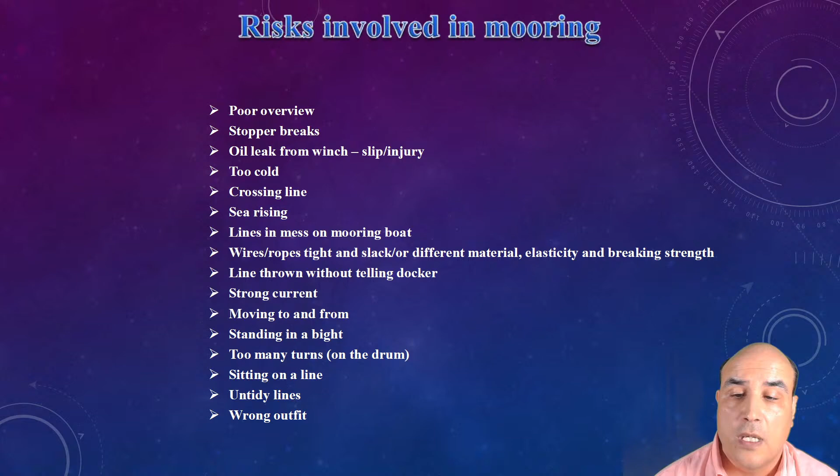Also, a mess on the quay when we're going to moor our ship, line caught in fender - this can create a snapback situation - bad communication between all parties, like pilot, master, mooring boat, tug master, and the crew fore and aft. Lines lying too long in sun and water, so we don't have proper housekeeping of the lines.

Language confusion, especially due to the fact that we have multi-ethnic crew on board, and this can create language confusion because not all crew speak the same mother tongue. Bad lighting, poor communication between pilot, captain and tug - this is in relation with, generally speaking, bad communication. Line singing before it parts - parts means cut into two pieces.

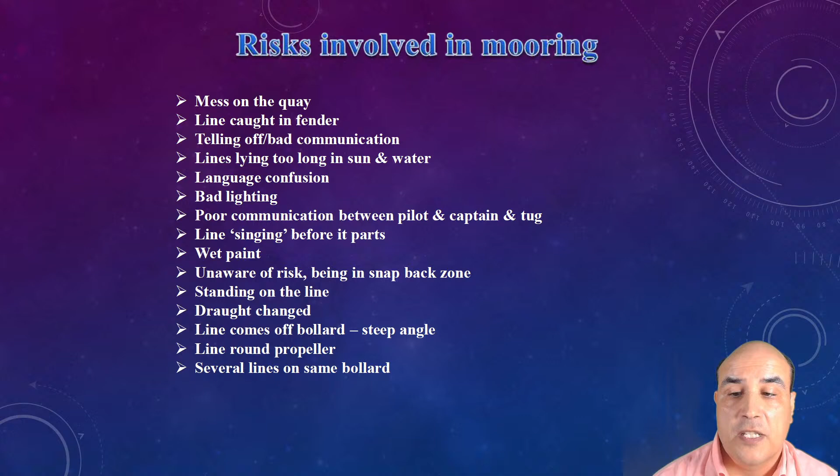Wet paint, unaware of risk, being in a snapback zone - this is in relation with onshore and onboard training of the crew. Standing on the line, draught changes, line comes off bollard, or having a dangerous steep angle - we'll see how a steep angle can create tension in the line. Line around propeller, several lines on the same bollard as unsafe practice.

Mooring incidents, when analyzed, can be categorized into 4 safety factor groups. This is in relation with risk management. Individual actions relate to human action by operational crew. Local shipboard condition is predominantly in relation with ship motion, or swell on the port. Organizational influences are organizational shortfalls, for example, lack of safety culture, safety management system that is not effective on board, lack of supervision by company, or lack of training by company or onshore support. Last but not least, design and equipment, design shortfalls or component failure, for example, mooring line parted.

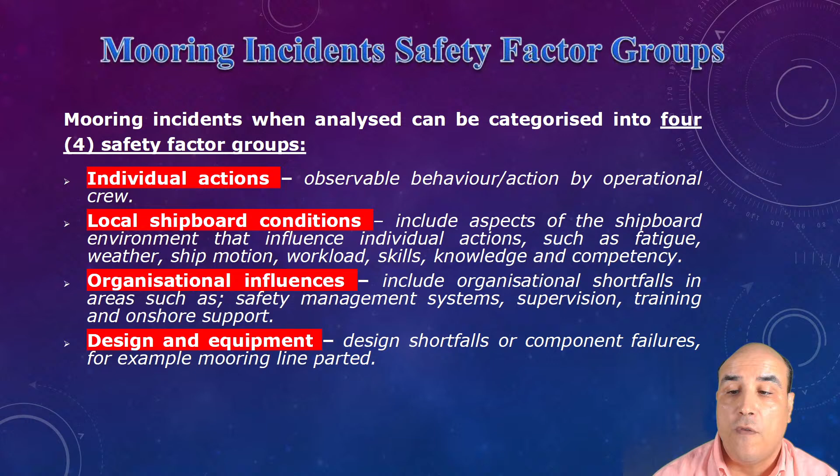Here we have some pie charts in relation with incidents. As you see, hit by parted ropes 53%, hit by non-parted ropes 42%, and only actual equipment failure only 5%.

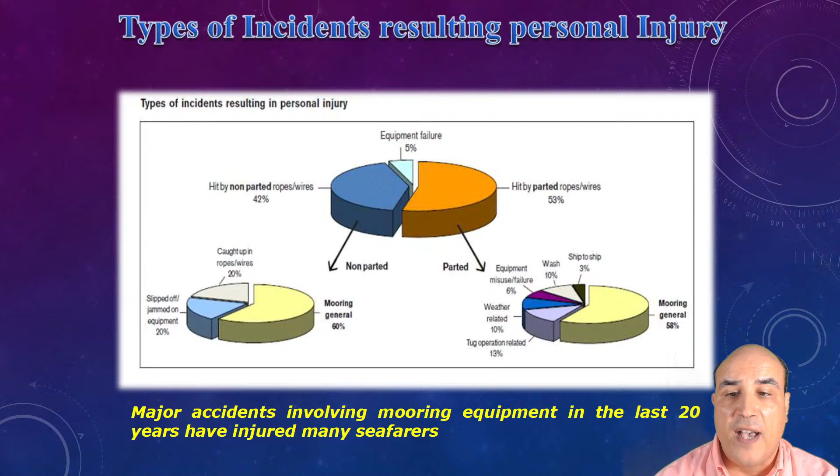Next pie chart is the reason that we make this webinar, just to show exactly the consequences of a human that gets involved with an accident during mooring operation. As you see in the percentage, more than 60% we have very serious injuries, plus 14% fatality.

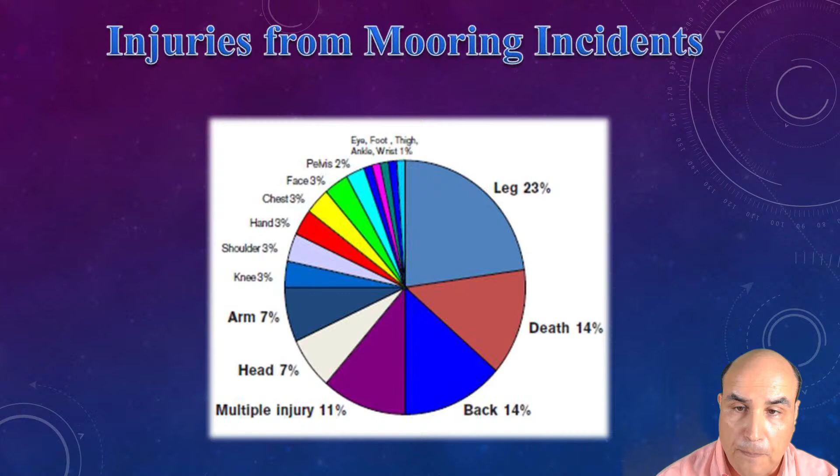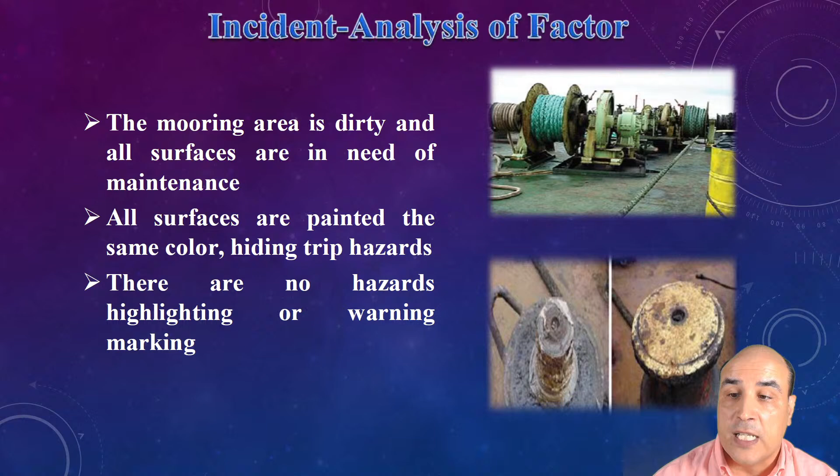Let's see the generic point of view analysis of these factors. First of all, the mooring area is dirty and all surfaces are in need of maintenance, so proper housekeeping is very important. All surfaces are painted the same color, hiding trip hazards. There are trip hazards that must be painted with different color, that's why we use yellow color for that. There are no hazards highlighting or warning markings.

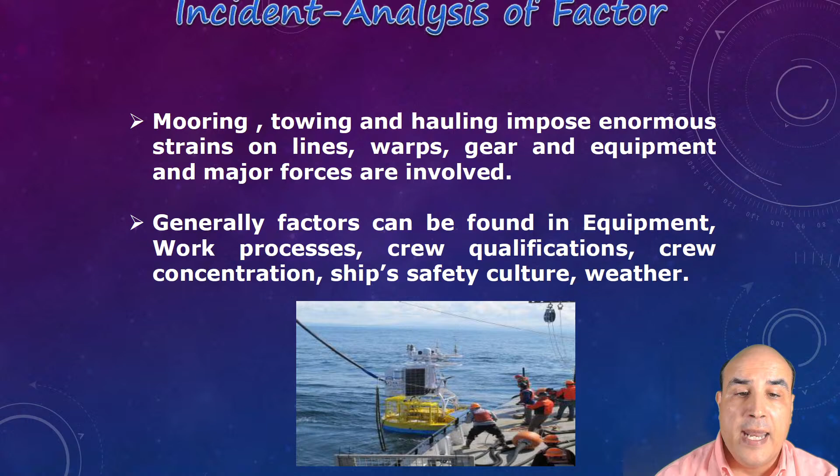Also, generic factors can be found in equipment, in the work processes through the safety management system of the company, crew qualifications, crew concentration, which relates to stress or fatigue of the crew, ship safety culture, and last, weather. Also, crew not aware of snapback areas, they don't know exactly what is a snapback area, or crew standing within a bight or coil, or crew has complacency.

Insufficient training, the person supervising also gets involved with the operation. Here I have to give one example: we have a duty officer on deck, aft, let's say, with 3 ABs, and instead of checking the position of his colleagues, he tries to do the job of an AB. So he or she is not watching. The job of supervisor is to make a risk assessment all the time, and of course to pass the orders or intervene if possible.

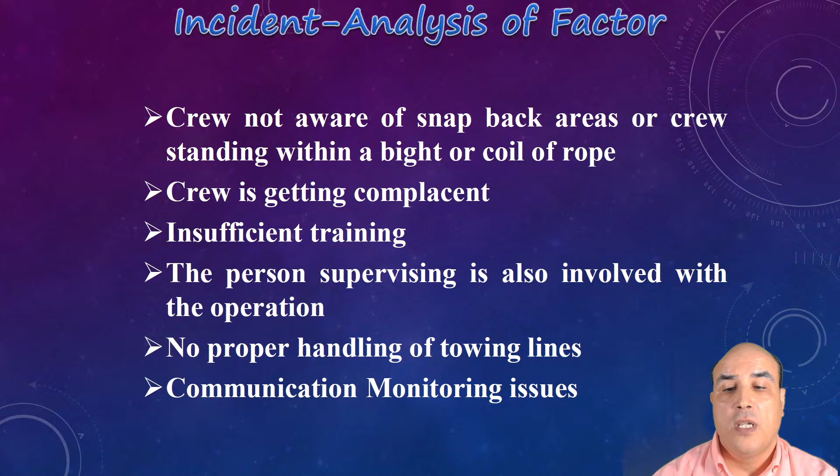No proper handling of towing lines, communication, monitoring issues. What we believe as humans is that things are safe if nothing happens. So because of that, we decrease the level of safety. And of course, if we decrease the level of safety, maybe we lose our concentration, maybe we slacken our procedure. So when suddenly something happens, it's not because of one factor, but because of a number of interacting factors, as we're going to see in the forthcoming slides.

Preventing accidents is about reducing the risk of these factors. Here we have the most common risks categorized according to risk management. First of all, in relation with equipment: use of damaged wire or ropes. Wire for tanker ships, ropes more or less for dry cargo ships. Poor equipment, poor design mooring system, no overview of mooring area, hazard tripping risk site not highlighted. Also work process like lack of communication, poor line handling.

But as you see, most risks are in relation with human factor. So crew qualification, maybe lack of knowledge of mooring operation, maybe they don't know mooring systems as well. Unclear instruction by the supervisor or by the team in general. Lack of information, lack of supervision by adequate personnel, adequate officer, competent officer. Small untrained crew, ineffective on-board mooring training without identifying and understanding the danger associated with snapback zones.

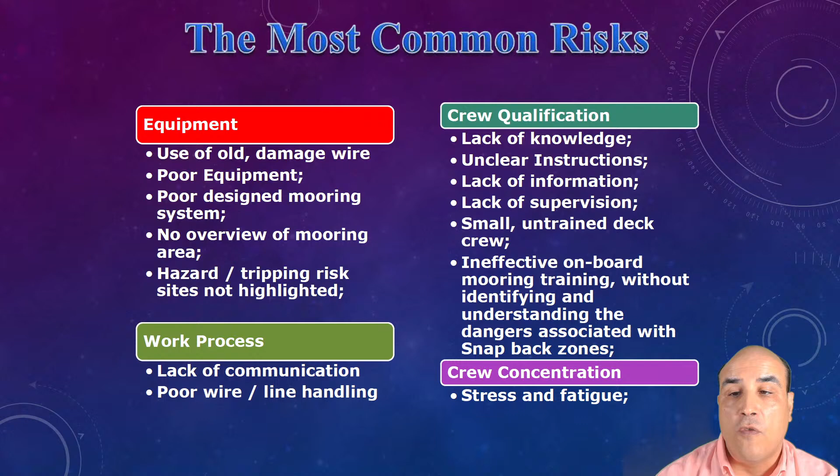Very important is the crew concentration, in case the crew concentration will be decreased if we have stress and fatigue of the crew. Furthermore, ship safety culture, like procedures not followed by ship, shortcuts taken, we don't follow the steps, we jump the steps, standing in a wrong place or in a bight, quick mooring sometimes versus safe mooring, no risk assessment process prior to mooring operation, cluttered mooring area or deck. This also can be related to weather conditions like ice, slippery deck, wind force and current.

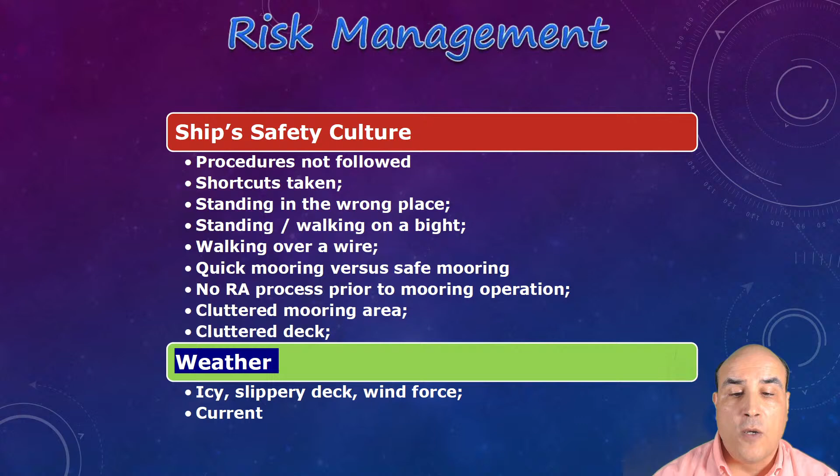In relation with risk management, this is the science that can identify the risk, analyze the risk, and also help us decide if the risk is tolerable or not. If the risk is tolerable, we can proceed with the action, with the job. If the risk is not tolerable, we must mitigate it.

Here we have a risk management formula, risk analysis formula, which is called bow tie approach. Normally shipping companies use bow tie approach as risk analysis or matrices. What we have here is hazardous activities, personal injury is the incident.

On the left side, we have the threat. Threat can be mooring operation. Between threat and incident, we have controls. What kind of controls? Preventative controls in order to avoid reaching an incident.

On the starboard side, on the right side, we have consequences of the injury. For example, in our case, maybe hospitalization, maybe serious injury, or even death. So, in order to mitigate the consequences, we have reactive controls or mitigating controls. This whole story is called bow tie approach.

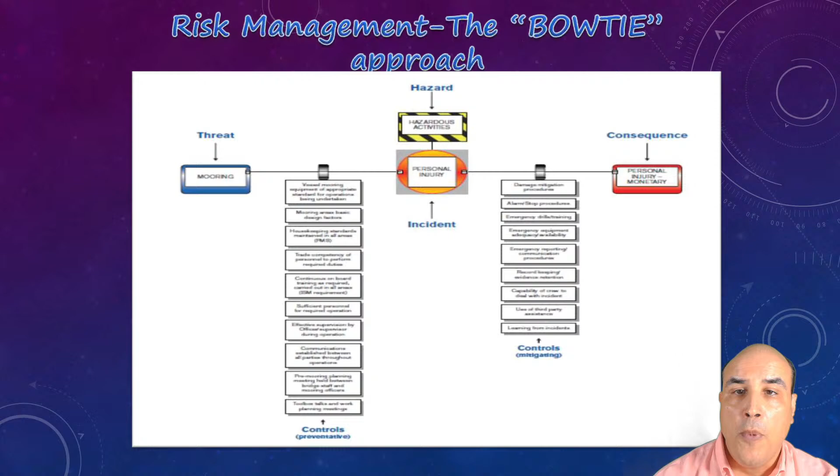Let's analyze a little bit in our case. Our example here is mooring operation. The preventative controls can be the following: vessel mooring equipment of appropriate standard for operation to be undertaken. Mooring basic design factor, this is in relation with shipbuilding, let's say. Housekeeping standard maintained in all areas.

Housekeeping is a very important component for level of safety. Trade competence of personnel to perform required duties. Continuous on-board training by crew, by officers. Sufficient personnel for required operation. Effective supervision by officers during operation. Communication between all parties. Pre-mooring planning held between bridge staff and mooring officer, or as we call it in communication, toolbox talks and work planning meetings.

With that kind of preventative controls, we just erase the problem of an incident. We will not have an incident. Of course, we can add more in this case.

The mitigating controls are, in case that we already have the incident, damage mitigation procedure. Of course, the crew must be familiar or must know how to stop, how to run in an emergency situation, how the crew and officers can make emergency reporting, and of course record keeping as evidence retention, capability of crew to deal with incidents because there will be incident investigation by someone, use of third-party assistance, and of course lesson learned from that kind of incidents.

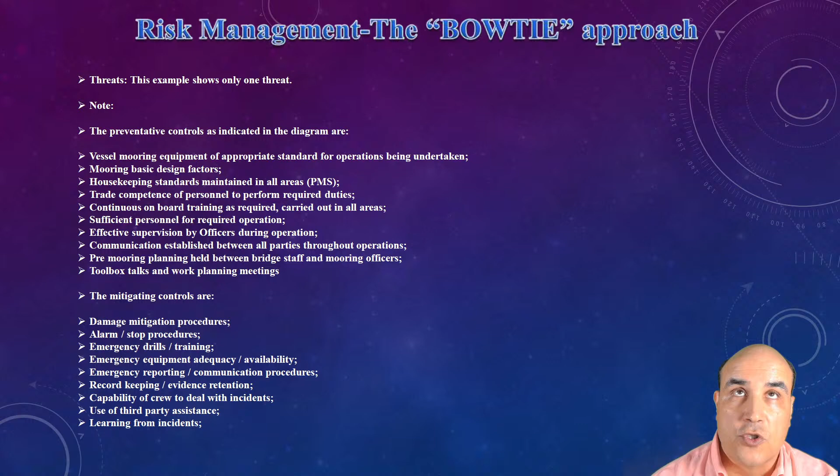Snapback, also called recoil, is the tendency of a broken end of a tension line to draw back rapidly after a line break. Statistically, the majority of serious incidents and accidents in mooring areas involve parting lines, lines that break into two pieces. The sudden release of energy stored in the tension mooring line when it parts is defined as snapback.

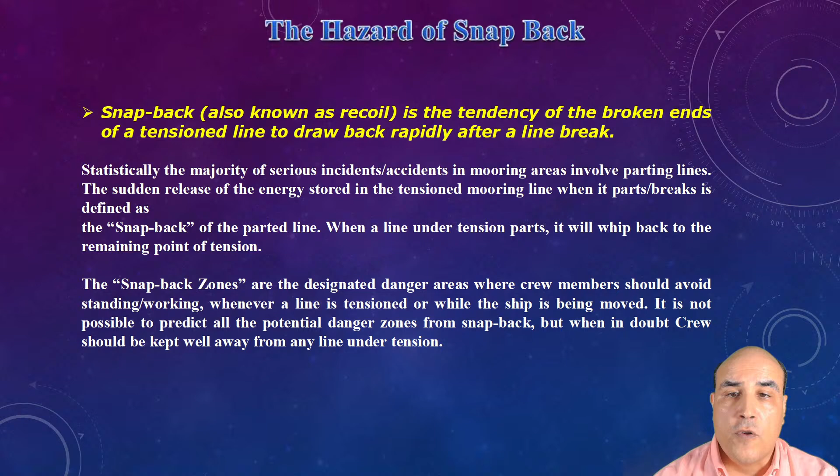Most of the rope manufacturers have already made a result on this. How is the recoil velocity? The recoil velocity of a snapback line is up to 800 kilometers per hour, or 500 miles per hour, which can be considered like a rifle shot. That's why it's very dangerous in case a line is parted.

Always pay attention, help to improve consistent understanding by using mooring area drawings, changing snapback zones due to changing configuration, minimize the amount of exposure to line under tension. Even lines with low recoil characteristics can have snapback risk.

For example, in case of crude oil tankers, they don't use synthetic fiber lines, but they use wires. And of course, these wires have a mooring tail made of nylon. Even this mooring tail can have a snapback risk. Use ship plans during onboard training and toolbox talks to illustrate snapback zones. And of course, a very important matter is to observe the position of colleagues and intervene if appropriate.

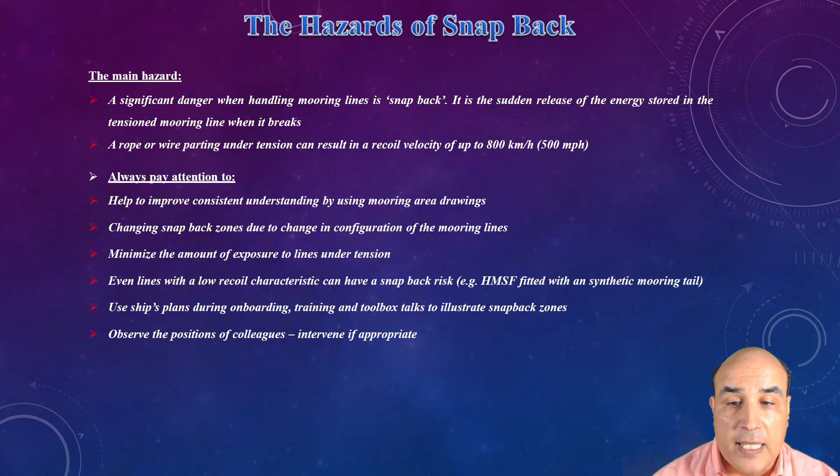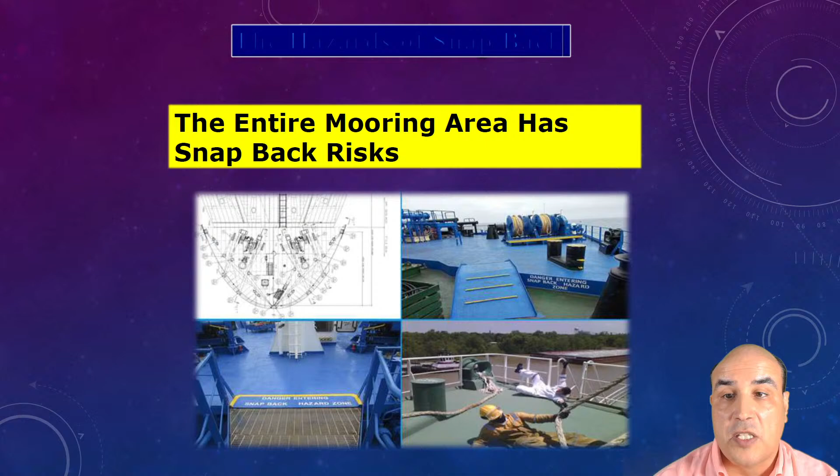Nowadays, we don't paint the deck in order to identify the snapback areas, due to the fact that the mooring area is considered as well a working area. Now we just put a stencil or a plate that says 'danger, entering a snapback hazard zone.' The entire mooring area has snapback risk. This is something to remember.

Also, 10 rule of thumb for assessing the mooring. If weather conditions become worse, put extra moorings. Mooring lines should be symmetrical, and we'll see later on in OCIMF guidelines. Breast lines are more effective when they are perpendicular to the ship center line, because breast lines are vertical lines and they must fall in a vertical angle with the hull.

Spring lines are more effective when they run fore and aft. This is the reason spring lines exist. Lines in the same service should be of the same length. The smaller the vertical angle, the greater the resistance.

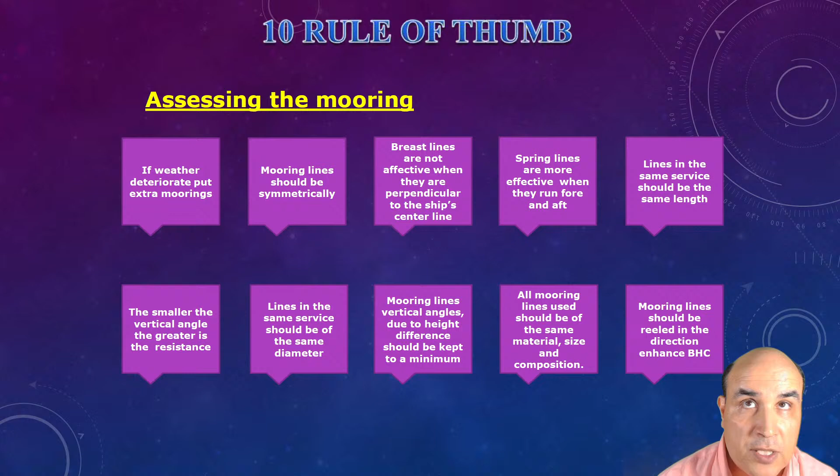This is in relation with breast lines predominantly. Lines in the same service should be of the same diameter. Mooring line vertical angles due to height difference should be kept to a minimum. All mooring lines should have the same material, size, and composition, because if they have different material, the weakest rope will break first. Mooring lines should be reeled in a direction that has brake holding capacity, and brake holding capacity should be considered greater than the heaving power.

Also, in order to moor safely, always wear protective safety equipment. Keep clear of any bight in a line or coil. Stand well clear of a taut line under load. Try to keep control of the line. Try to make sure the line is properly secured.

Try to anticipate any situation which may cause a line to run out of control. Keep clear of snapback zones. Never, and this is for every ship, stand too close to a winch drum or bitt when holding a line. Never apply too many turns to a line.

Never bend the line, or stand in a bight of a line, because you could fall down and have an accident. Never try to catch a running line by grabbing it with your hands without wearing protective gloves, or even wearing protective gloves this is also dangerous, or by stepping on it with your foot.

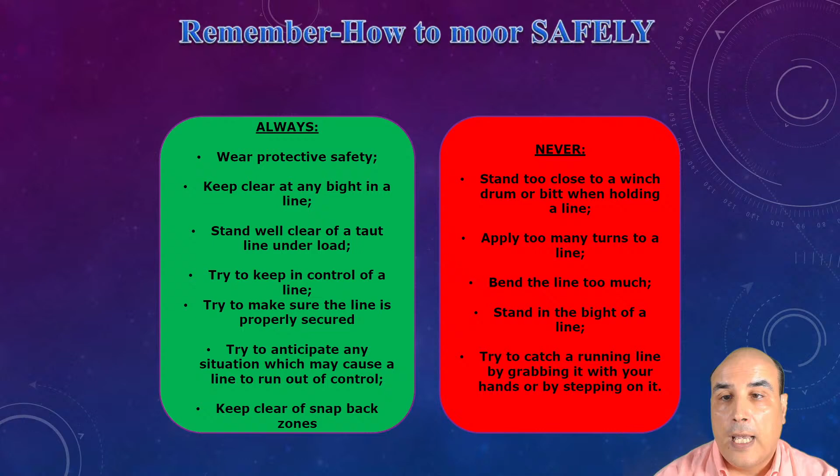Now we have to give you some information about the recommendations by the Oil Companies International Marine Forum, OCIMF. Even though OCIMF is predominantly for the tanker market, nowadays because of the Rightship inspection questionnaire, which we also have to discuss, they have already put elements of OCIMF MEG 4, Mooring Equipment Guidelines 4, inside the Rightship inspection questionnaire. So actually you can see this kind of information applied for every kind of vessel.

First of all, in this figure, all these figures are from the OCIMF book. The horizontal angle of head, stern and breast lines must be less than 15 degrees. Here, as you see in this figure, we have spring lines, breast line, head line and stern line.

Originally, primary lines are considered the breast line and spring line, and secondary lines are considered the head line and stern line. So in a case that we have a mixed mooring system, for example using ropes and wires, we put wire as the primary line because it has better strength, and synthetic fiber ropes as the secondary line, head or stern.

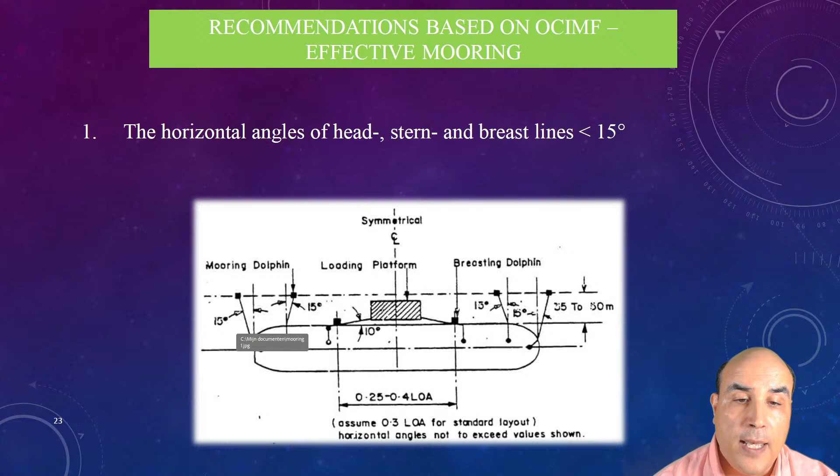Also, the vertical angle with the horizontal plane must be less than 25 degrees. The effective force is proportional to the cosine of the angle. So if the angle is 25 degrees, the line is effective for 91%. If the angle is 45 degrees, the efficiency is reduced to 71%.

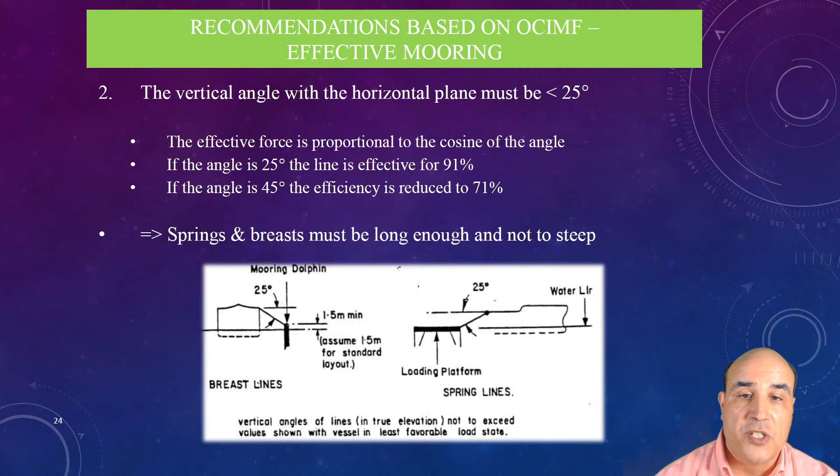Also, breast lines, as we say, are perpendicular to the hull and try to keep our vessel standing still in the dock. Breast lines are most effective on the longitudinal axis when they have an angle of 90 degrees with the hull. As you see here, the tension is less than in the case where we have an angle of 45 degrees with the hull, so the tension will be increased.

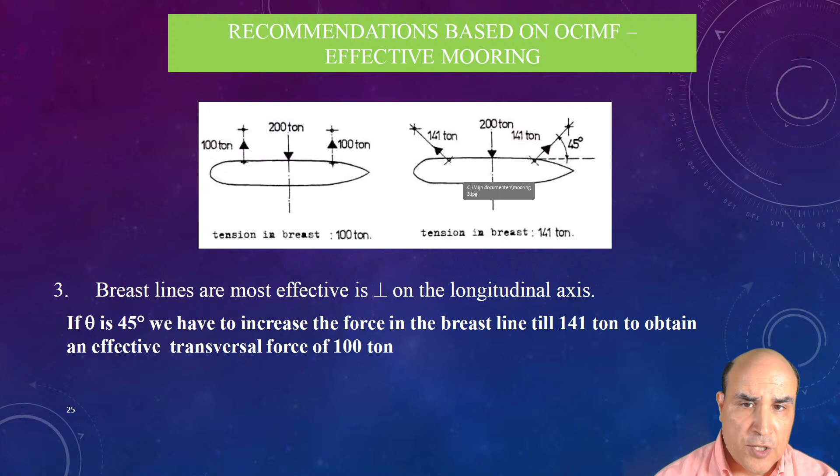Also, springs offer the greatest holding power in the longitudinal direction. As you see here, they are in a parallel direction with the hull, and here the tension is less than in a case where we increase the angle, say to 45 degrees or more. As you see, the tension will be greater.

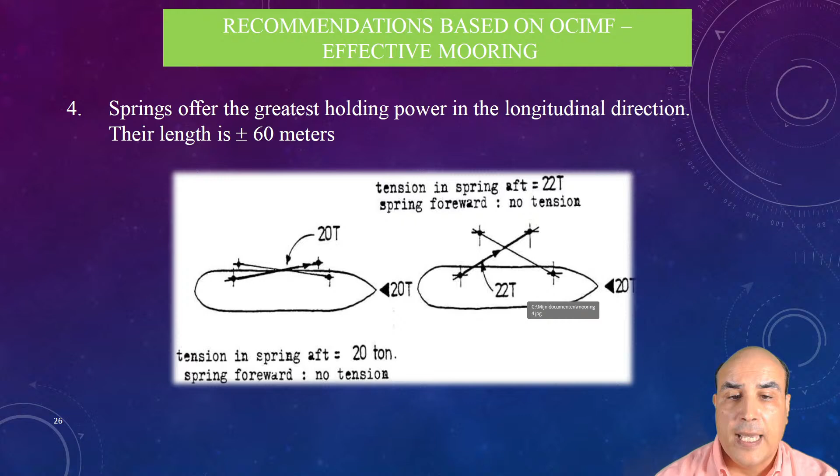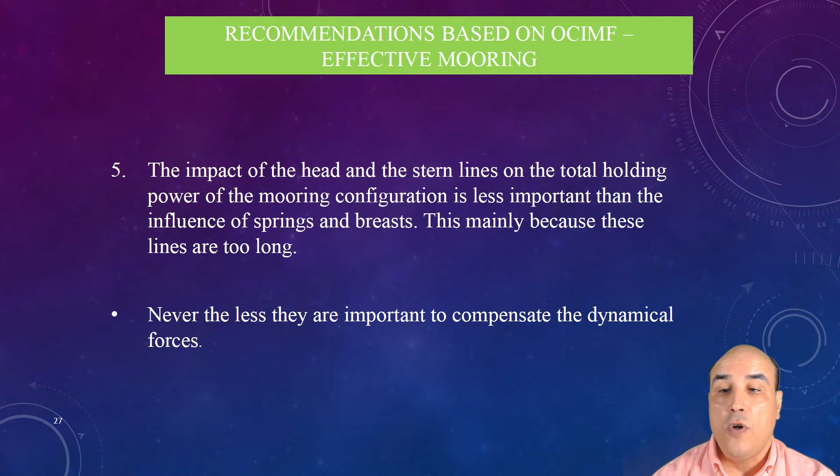Also, the impact of head and stern lines on the total holding power of the mooring configuration is less important than the influence of spring and breast lines. This is mainly because those lines are too long. Okay, this is one reason. Very short lines must be avoided, as they always take the most important part of the load.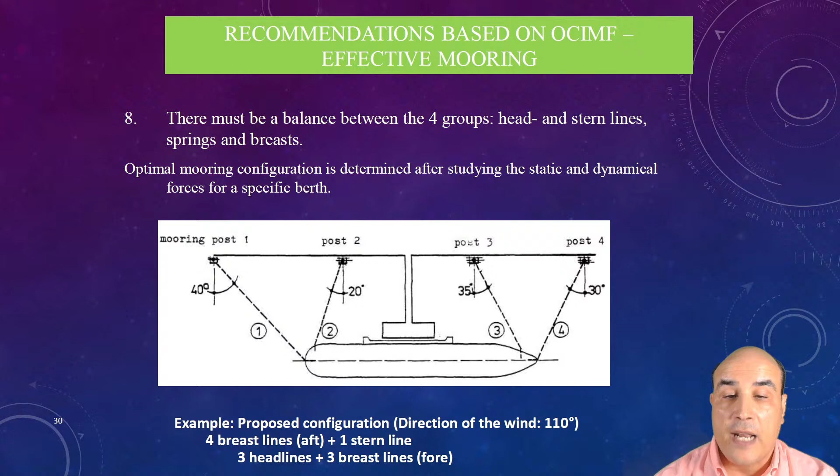Also, the number of lines is a function of the size of the ship and the prevailing weather conditions. Of course, as I told you before, if we have adverse weather conditions, we put extra moorings. But anyway, the number of lines depends on the size of the vessel. Normally, a big size vessel, let's say a Cape-size bulk carrier or a Panamax bulk carrier, uses a system of 4-2 forward, 4-2 aft, normally 12 lines at least in order to moor the vessel properly.

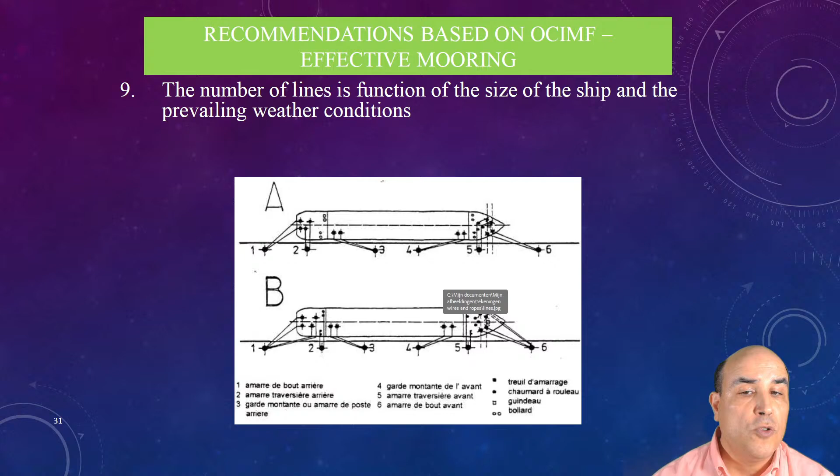Now we have to discuss about Rightship. What is Rightship and what is its role through the vessels? I have put one definition from their site - they call themselves the world leading environmental, social, governance (ESG) focused digital maritime platform providing expertise in global safety, sustainability and social responsibility practices.

Maybe this is not well understood. What actually they do is vetting inspection, second party audit on behalf of charterers. That's why Rightship right now, especially in dry cargo vessels, is like a monopoly. Rightship was created in Australia and nowadays has offices around the globe.

Rightship has developed, since the last 4 years let's say, a questionnaire. This questionnaire now we have the version 3.1, which started to be effective since September 2024. The Rightship Inspection Questionnaire 3.1 comprises 16 sections.

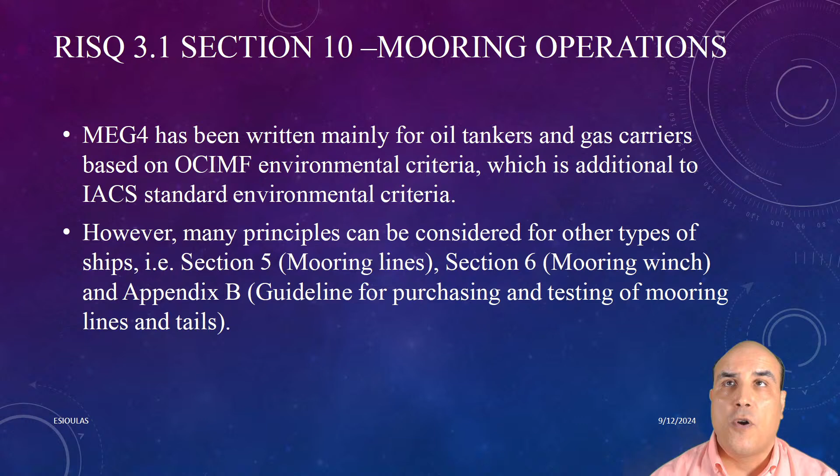Section 10 has 23 questions, and for these 23 questions Rightship also gives some guidelines in order for the vessel to be properly prepared, as well as for the company to be properly prepared, and of course that can be an aid to memory for the Rightship inspector.

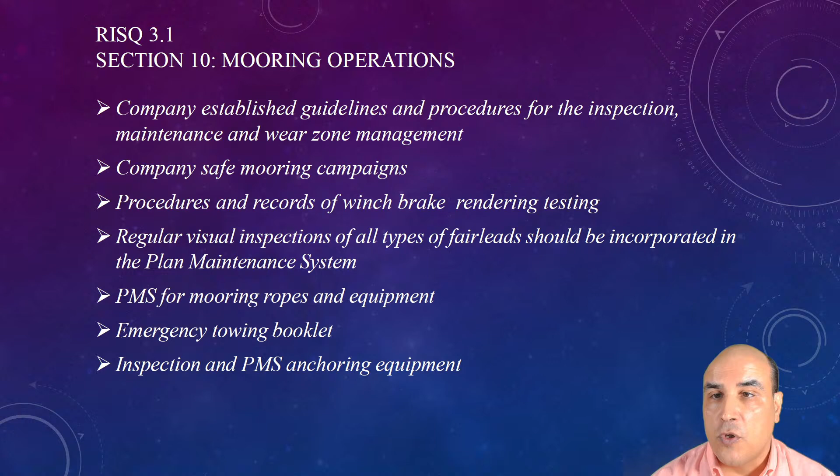This is the generic point of view of the section 10 elements. Let's see now one by one the questions. Of course I'll try to be brief for this, because I would need more than 2 or 3 hours to explain in detail, so I'll try to be brief to you.

First question: has the company established guidelines and procedures for the inspection, maintenance and wear zone management of the mooring lines, and have they been implemented? The inspector has to make a random check of the ship mooring line management plan - there must be on board a line management plan according to INTERTANKO guidelines.

So they use again principles from the tankers. And of course here they give a definition of what is a line management plan.

It is used to manage the operation and retirement of mooring lines and tail, if any tail, for dry cargo ships - because as I told you, the Rightship inspection questionnaire is predominantly for dry cargo ships, not for tankers.

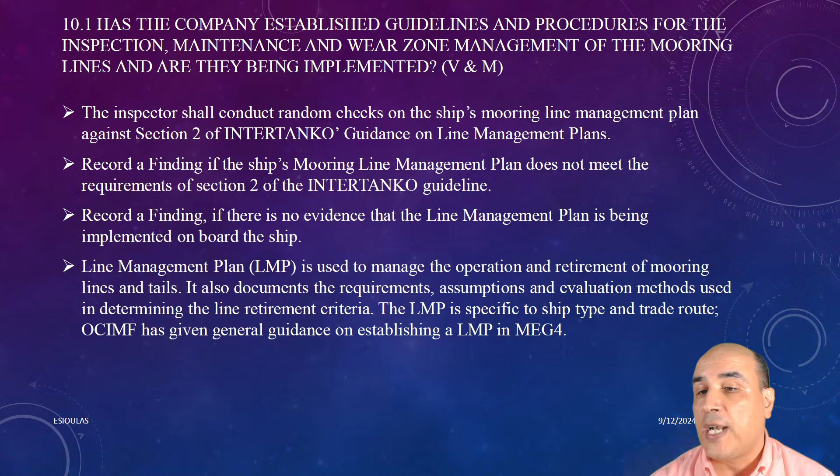Also, they have to check that all types of mooring line experience localized fatigue and damage caused by common line routing and deployment process. So they have to check, and everything has to be written in a line management plan.

Also, about conventional fiber lines that a dry cargo vessel normally has, they can be checked at routine intervals and of course must be inspected by a competent person.

Who is the competent person? Normally on board, the competent person is the ship's safety officer or the master - they just give an asterisk about that. The personnel responsible for rope inspection must be properly trained to recognize rope damage and to understand the rope inspection procedure and retirement criteria, so he must be a well-trained person in order to make that kind of routine checking.

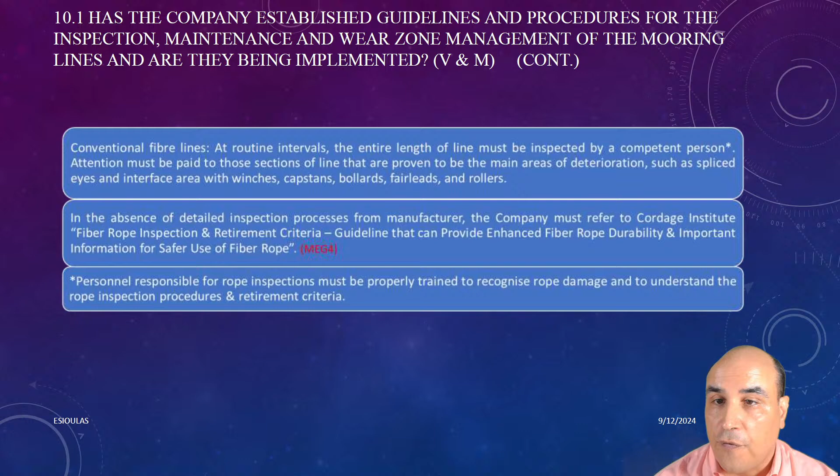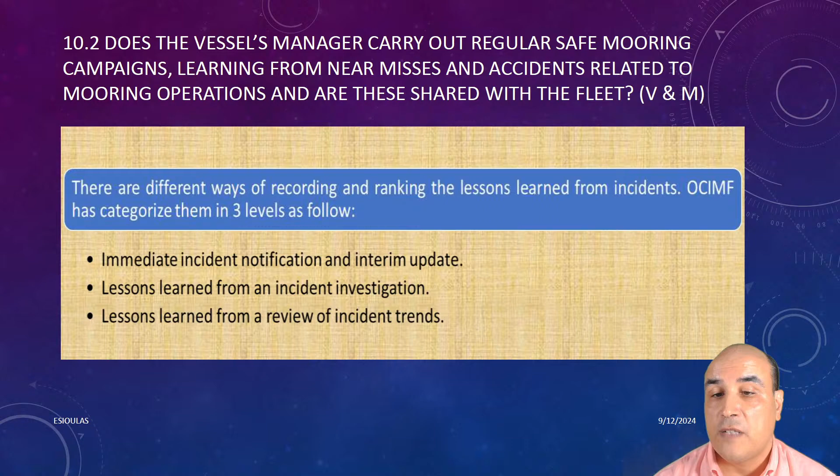Question 2: Does the vessel manager carry out a regular safe mooring campaign? This relates to company and vessel management. They have to give the crew case studies and lessons learned from accidents, incidents, or near misses. A near miss is an accident waiting to happen. According to OCIMF's suggestions, there are different ways of recording and ranking lessons learned from incidents, categorized into three levels: immediate incident notification, lessons learned from an incident investigation, and lessons learned from a review of incident trends.

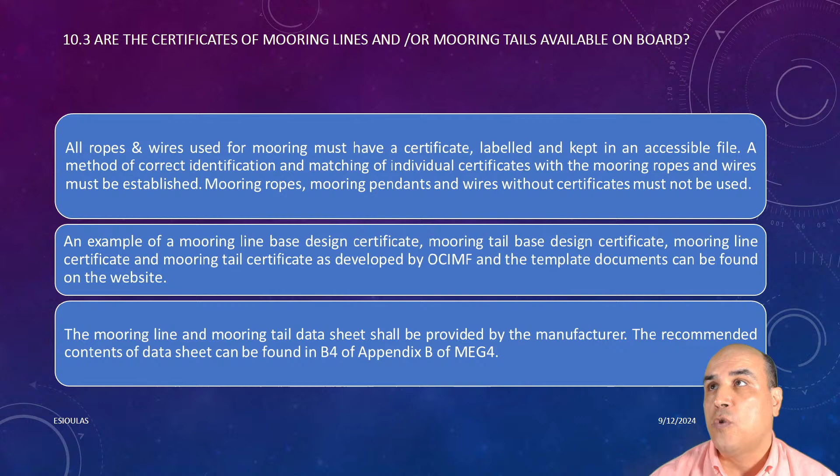Question 3 relates to the certificate of mooring line or mooring tail, if applicable, available on board. The master must keep the certificate of the rope to show to a Rightship inspector. Question 4: Do the mooring line and mooring tail comply with industry guidelines?

They also have to check that the line design break force of the lines is not above the specified limit, according to manufacturer details.

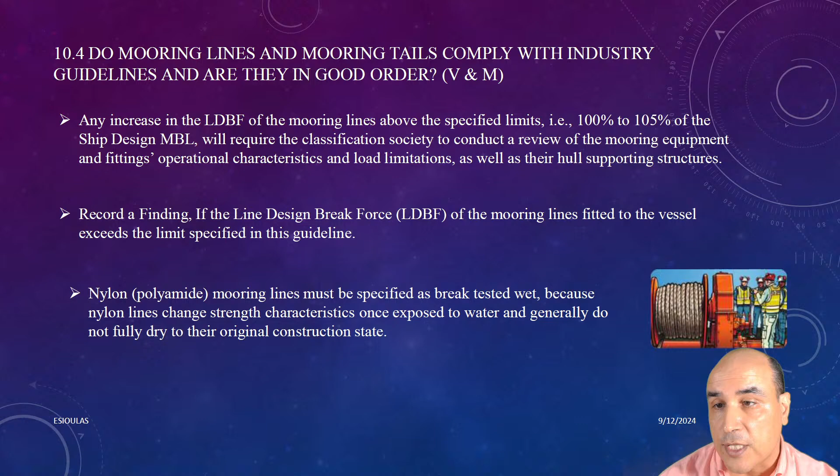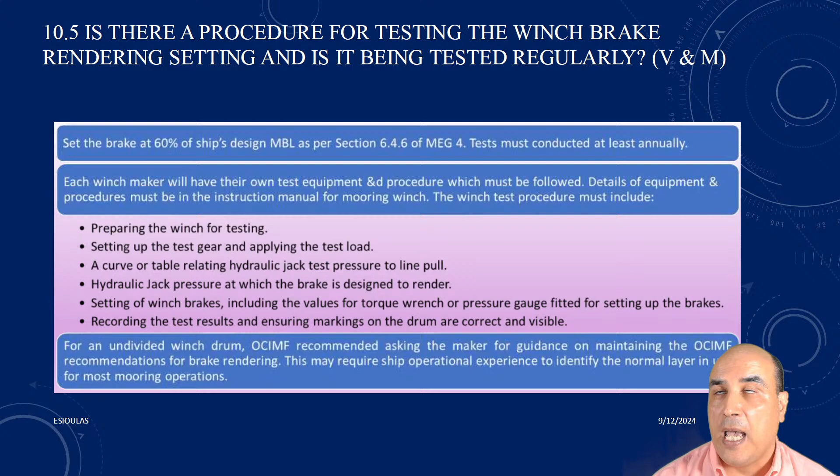Question 5: Is there a procedure for testing winch brake rendering is set? What we've learned through safe practice is that we set the brake at 60% of the minimum breaking load of the winch. This must be written into the line management plan or the safety management system.

Let's go in brief to question 6: Are the mooring lines correctly deployed as intended? One example given in the Rightship inspection questionnaire guideline is that if a vessel runs four headlines, all four lines must be constructed of the same material and rope type, so we must have the same specification of rope material.

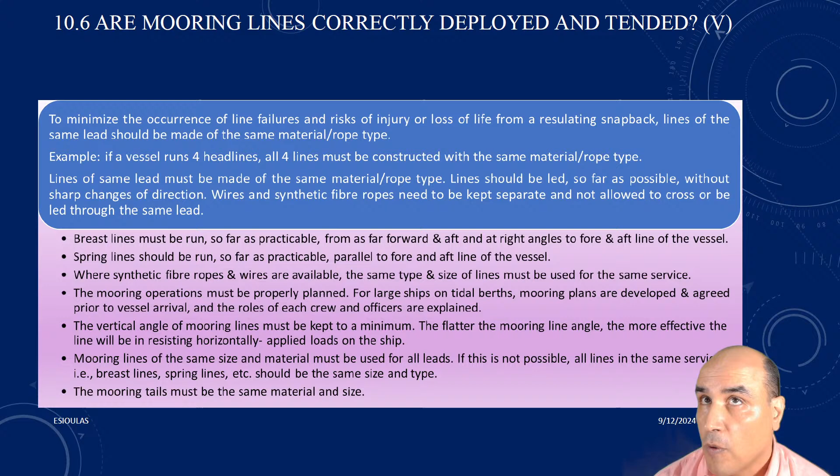Lines should be led, as far as possible, without sharp changes of direction. Wires and synthetic fiber ropes need to be kept separate and not allowed to cross or run through the same lead. As we've already said, per OCIMF guidelines, breast lines must be run as far as practicable, as far forward and aft, and at right angles to the fore and aft line of the vessel, and so on, as shown before.

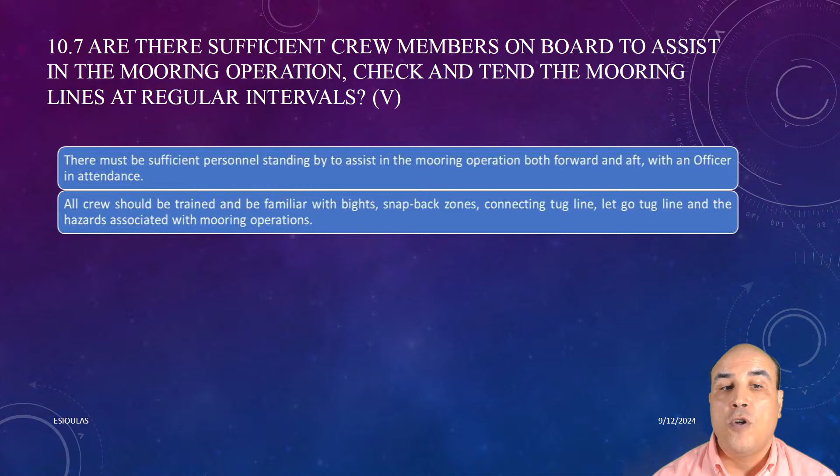Question 7: Are there sufficient crew members on board to assist the mooring operation? This relates to human resource management on board and through the crew management office. We must have sufficient crew, well trained and familiar with bights, snapback zones, connecting the tug line, letting go the tug line, and all that kind of stuff.

Question 8: Are all mooring lines on winches correctly reeled on the drums? The effectiveness of the brake depends on the rope being correctly reeled onto the drum, so this must be checked by a Rightship inspector.

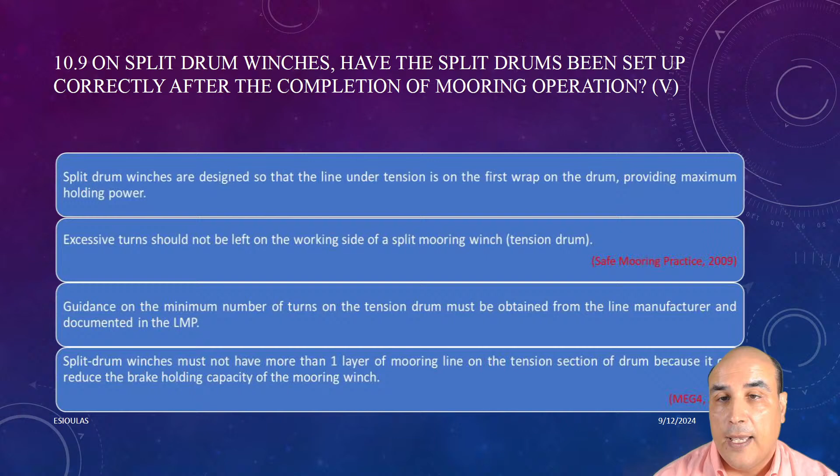Question 9: On split drum winches, has the split drum been set up correctly after completion of the mooring operation? Split drum winches are designed so that the line under tension is on the first wrap of the drum, providing maximum holding power for efficient mooring operation.

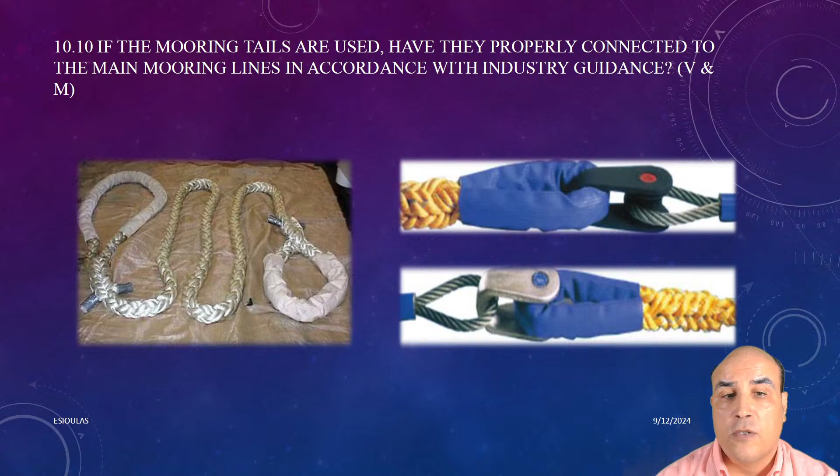Question 10 may not be applicable for dry cargo vessels since they don't use mooring wires, but in case a dry cargo ship does use mooring wires, they'll use a mooring tail. This mooring tail must comply with industry guidelines, connected with shackles, Mandal, or Tonsberg.

Question 11: Are the mooring ropes stowed clear of the deck, and are mooring stations well lit, clear and free from oil leaks? This relates to housekeeping, which can upgrade the level of safety. The mooring station must be well lit, with no broken or poor illumination, clear and free from oil leaks, and the deck suitably prepared to prevent slips or trips of the crew.

The mooring ropes must be stowed clear of the deck, actually on a pallet. The area must be free of obstruction that could hinder the view of the mooring deck. The mooring station, so far as possible, must be painted with a non-slip treatment. Mooring areas contain many trip hazards, and all surfaces must be painted a contrasting color to highlight trip hazards like saveall, windlass, platform, and so on.

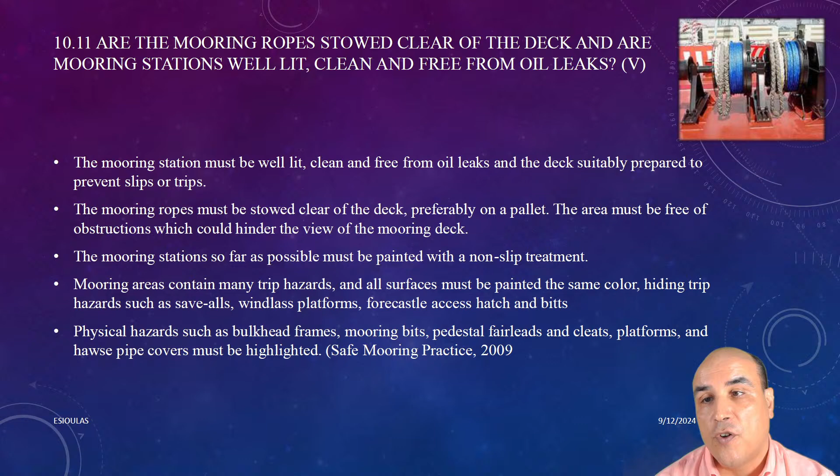Also, that kind of information exists through the Safe Mooring Practice booklet, here in relation with the heaving line and especially the edge of the heaving line, which is the monkey fist.

The monkey fist normally cannot be made by iron, because if made by iron it can hit the boatman or any man on the quay. RightShip suggests the monkey fist should be made with rope only and must not contain added weight material such as iron inside. Safe alternatives include a small high visibility soft pouch filled with fast draining material, with a weight of no more than 0.5 kilos.

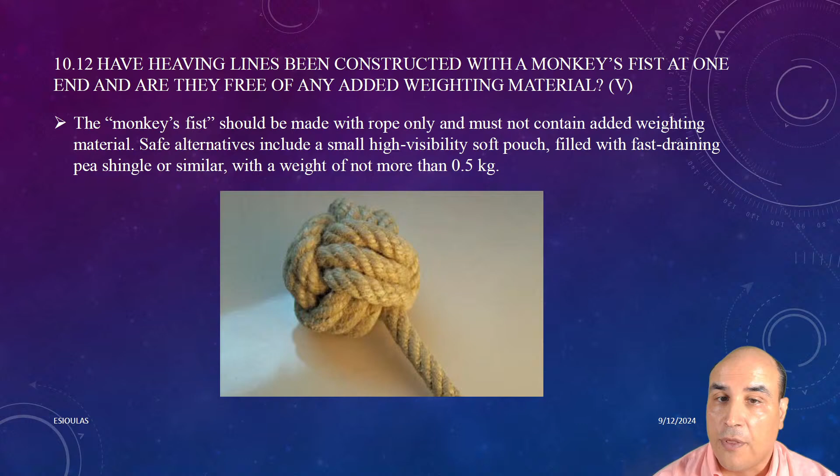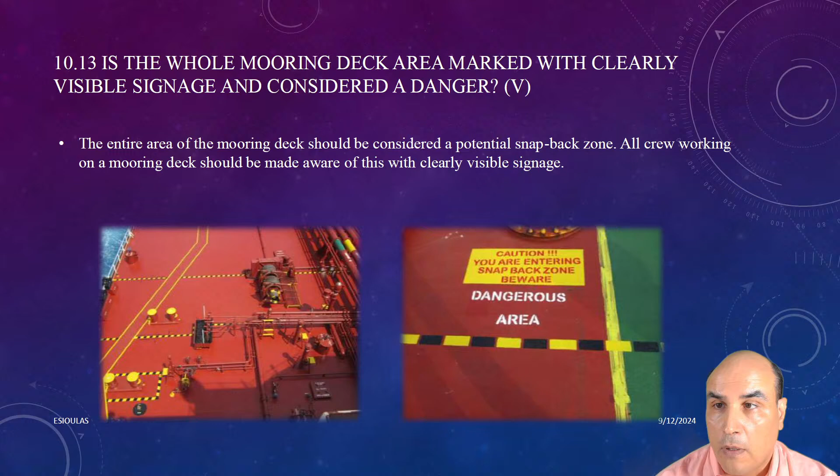Also, we've already discussed that the whole mooring deck area should be marked with clearly visible signage as danger. Here we have an area, let's say the spring area of a ship, and this can be a plate or stencil showing you are entering a snapback zone, because nowadays all mooring area is considered dangerous and all mooring area is considered a snapback zone, in order for the crew to be aware of that.

Also, check if appropriate stoppers are in use and mooring ropes are turned up to the bitts correctly - this is seamanship practice for those who don't know. With fiber ropes, the stopper must be of the same material. One exception is polyamide rope, nylon rope, where the stopper must be from a different material than nylon, because there is no friction between nylon and nylon.

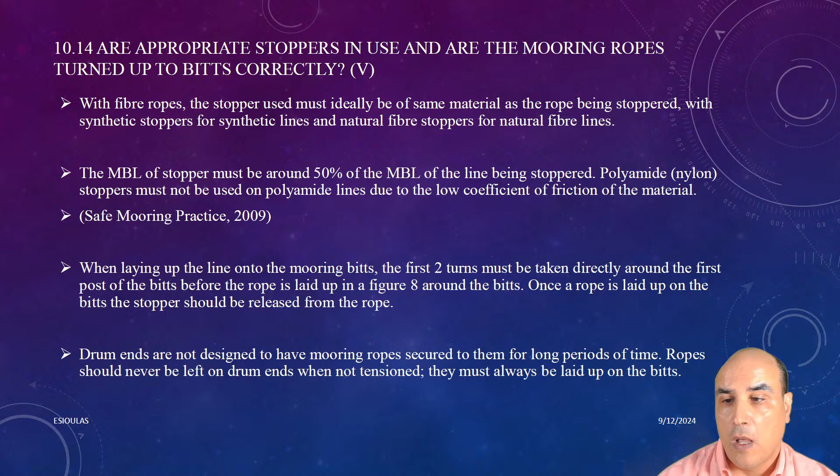Question 15: is there any control of leakages, operating level, brake drums, brake linings and pins of the winches, as well as working access arrangement to the winches? So all the winches must be, as they say here, fully accessible.

They also give some guidelines. The brake drum must be free of corrosion, pitting and rust scale. The grease nipple must be free of rust, paint, salt and grit. Check the brake lining for significant wear. Brakes must be examined to ensure all linkages are working correctly. Equipment maker's manual provides detail for the permitted minimum brake band thickness and so on. This is in relation with brakes and brake drums generally.

Also, pedestal fairleads, roller fairleads and other rollers that help us give the line ashore must be well greased, free of any grooving, corrosion and free to turn. This can also be checked by the surveyor.

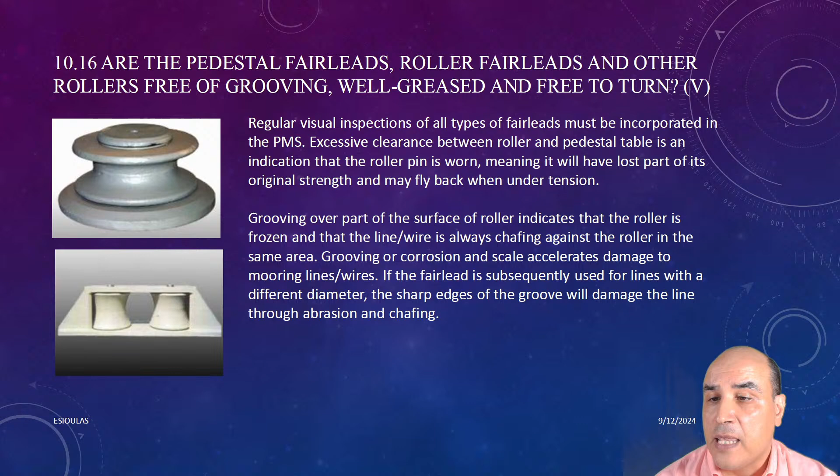As well, for question 17 about bitts, chocks and other items - apart from being in excellent condition, especially for those items, they must also have a safe working load marked, shipboard fittings must be marked.

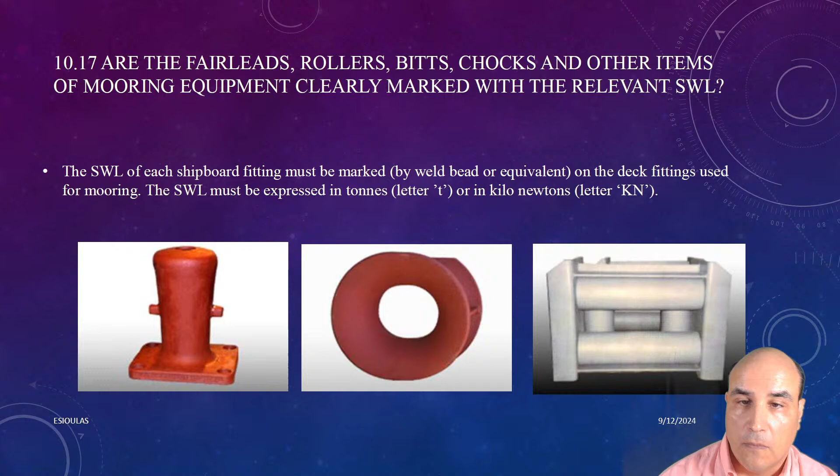Question 18 about windlass, anchor, locking bars and cable - this is in relation with anchor awareness. There must be inspection of anchor shackle, swivel, the joining shackles like Kenter shackles, the D-shackle which is the weak link of the anchor, crown pin and so on. These must be checked to ensure they are not worn down or have any missing items. Inspection of cable for damage and missing studs, and of course this must also be checked per the class society's anchor cable replacement, if any. Inspection of cable markings, both permanent and painted, and some other equipment predominantly within the anchoring system.

This is question 18. Question 19: has the anchor been tightly secured in the hawse pipe? Something that's common is that when moored alongside, the anchors are not in use, so they must be secured by the brake and the guillotine, and of course the anchor should be housed in the hawse pipe properly. The guillotine is to secure the anchor and of course the chain.

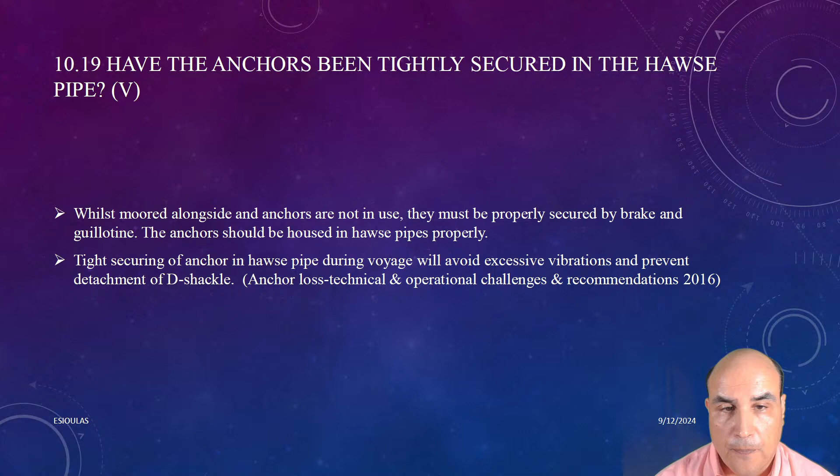Question 20: are the chain locker doors firmly battened down and are the bitter end securing arrangements in place? This is in relation with the bitter end of the anchor system, which must also be marked and well painted.

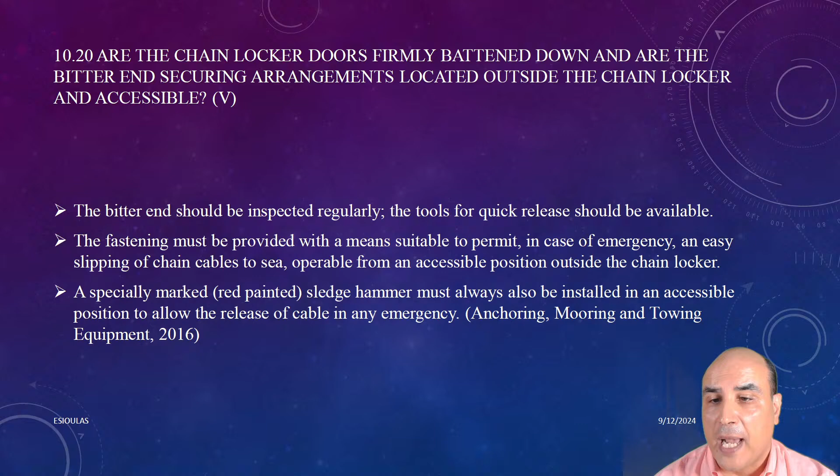Question 21: is the master aware of the limitations of the anchoring equipment? Here the master has to check the anchoring equipment and read the manufacturer's recommendations or any other recommendations from inspections.

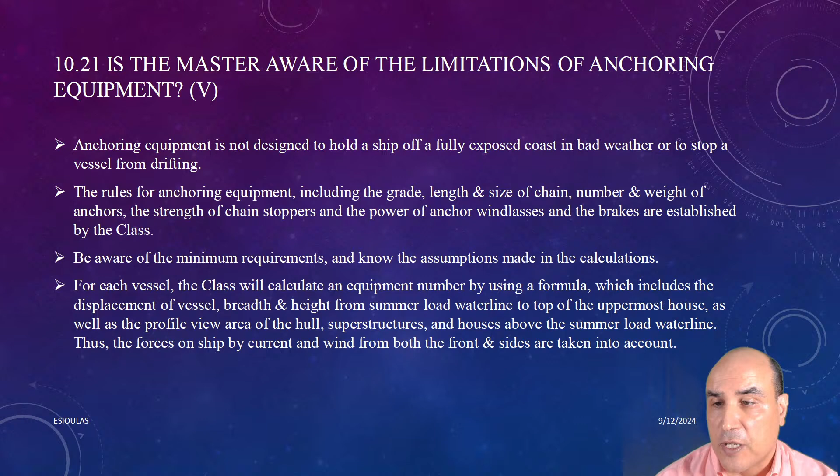Question 22: has the vessel been provided with a ship-specific emergency towing booklet? For every vessel since the 1st of January 2012, the emergency towing booklet should be ship-specific first of all.

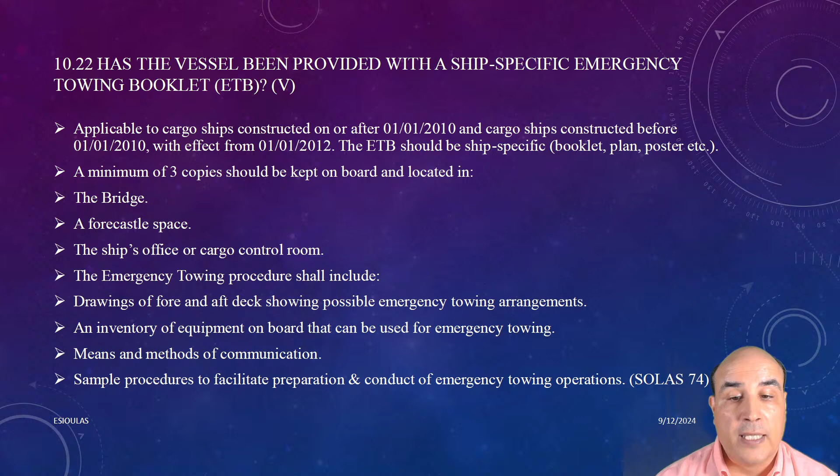Booklet, plan and poster, minimum 3 copies should be kept on board and located on the bridge, the forecastle space, the ship's office or cargo control room. The emergency towing procedure shall include drawings of fore and aft deck showing possible emergency towing arrangement, an inventory of equipment on board that can be used for emergency towing, means and method of communication between all parties, between the tug in front of us that helps us, the salvage tug, and a sample procedure to facilitate preparation and conduct of emergency towing operation according to SOLAS 74.

The last question is more or less a typical Australian question, due to the fact that Rightship is actually an Australian company. So they have incorporated a local regulation into the Rightship inspection questionnaire, and this is in relation with the ports of Pilbara and Rio Tinto. These ports do not exist in Brazil, only in Australia.

So maybe for your ship this is not applicable, maybe your vessel doesn't go to Australia. This is for vessels of dead weight more than 120,000, so Capesize or more. The requirement for Capesize vessels with dead weight more than 120,000 calling at the port of Hedland in Australia is to have a set of 120 ton safe working load bitts and leads, and this came into force 1st of February 2021.

Pilbara Ports Authority requires all vessels with dead weight 120,000 or more to have at least one set of bitts and Panama lead roller fairleads on the aft deck, on or near the center line.

The Pilbara Ports Authority towing arrangement, associated foundation, and supporting structure must be subject to periodic survey at least once every 5 years. The towing arrangement must be permanently marked with safe working load and appropriate serial number so that certificates can be easily cross-referenced. Ships must also hold a class certificate attesting to the strength of the towing arrangement, foundation, and so on.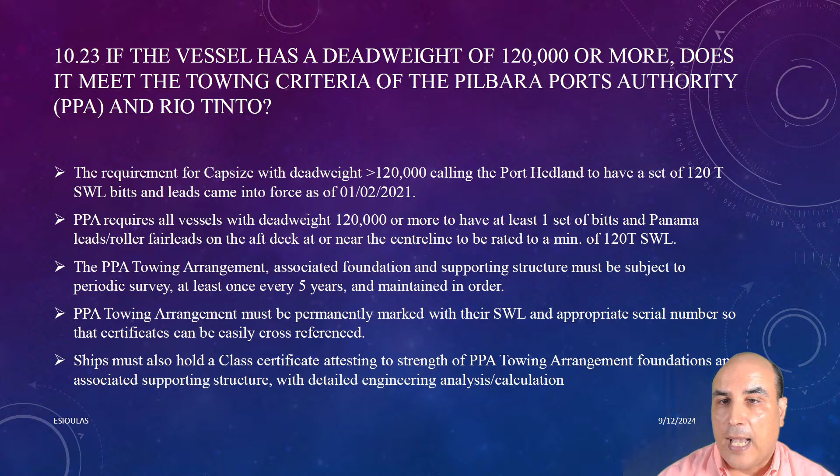Okay, I have finished with the questions of the Rightship inspection questionnaire. My time is limited to explain more, but I want to show you observations from previous vessel Rightship inspections. I use the word observation, but the most common word for that is non-conformity, because we need an immediate corrective action by the vessel or by the company. Let me give you some brief observations to be more familiar with.

No line management plan provided with procedure for inspection. So the vessel does not have a mooring line management plan.

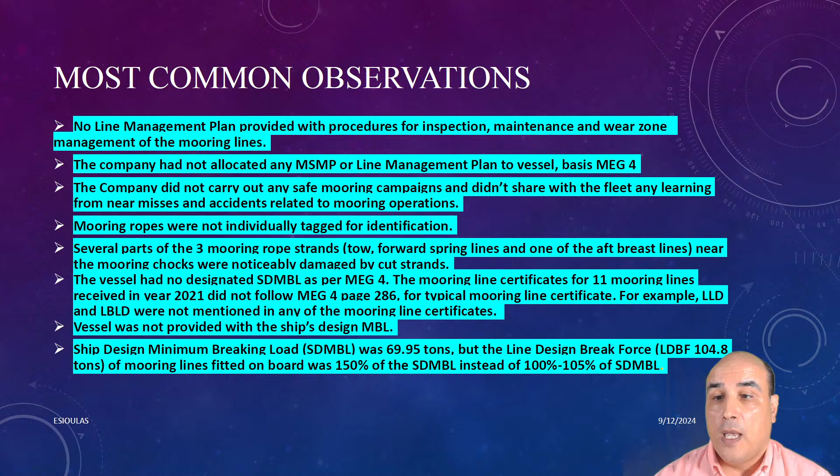Another observation: one of the poop deck ropes, reeled on drum, was observed with an eye splice in poor condition. So 4 new ropes have been ordered. This is a corrective action.

Also, the mooring winch brake rendering point was calculated at 80% of the minimum breaking load, whereas according to safe practice guidelines by OCIMF as well as Rightship, it must be 60% of the minimum breaking load.

The aft mooring area is not sufficiently illuminated; it must be properly lit. So that can be an observation or non-conformity noted by an inspector.

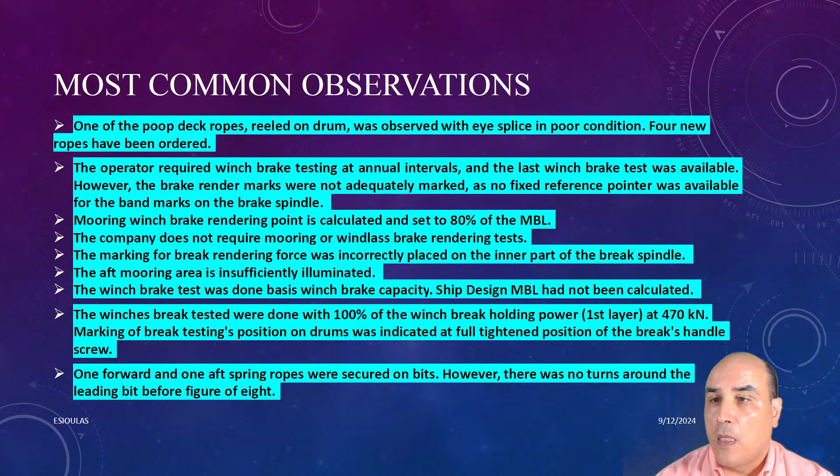Also observed: mooring lines at the forward and aft mooring stations used on the same lead were of different type, size and material. For example, using lines from nylon or polypropylene, and polypropylene has less elasticity than nylon, so it can break first. Also, the aft mooring area is not sufficiently illuminated.

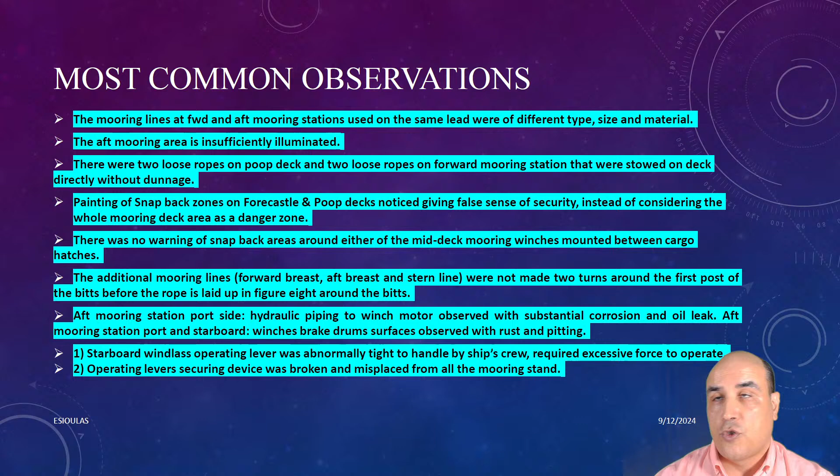Also, painting of the snapback zone on forecastle and poop deck gives a false sense of security, instead of considering the whole mooring area as a danger zone. All mooring area should be considered a danger zone. There was no warning of snapback areas around either of the mid-deck mooring winches, same as the previous observation.

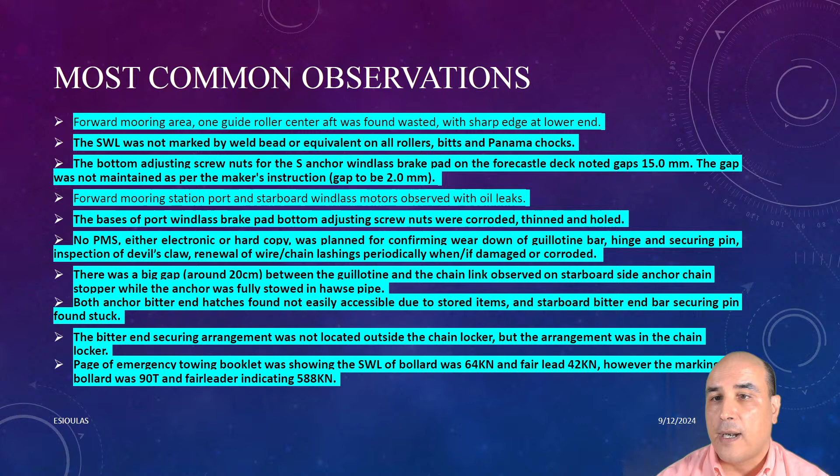Also, at the forward mooring area, one guide roller center aft was found wasted with a sharp edge at the lower end. Forward mooring station port and starboard windlass motors were observed with oil leaks. As mentioned before, we have to prevent oil leaks from mooring stations or any wastage from guide rollers, for example.

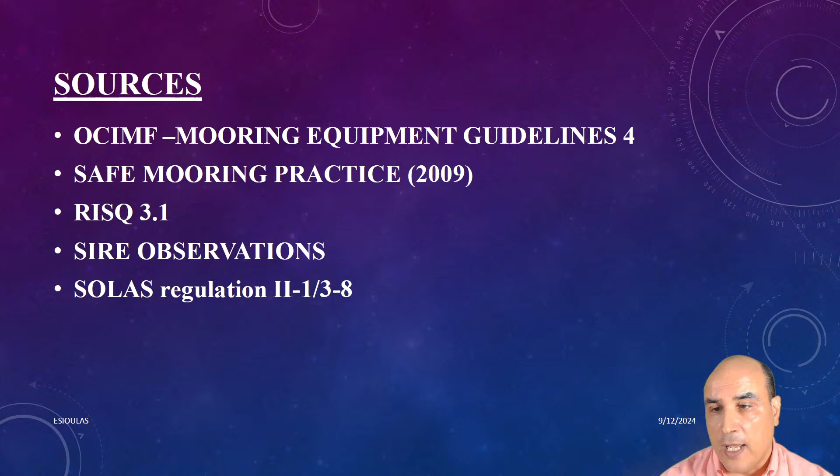And I have some questions, if any. Let me check for some questions. As far as I see, we don't have any questions so far, so I have to close the presentation.